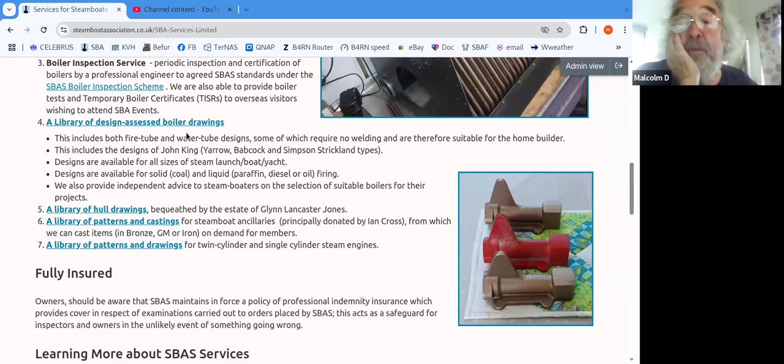And as this page says here, we have a library of boiler drawings, which we're not going to talk about tonight. We have a library of hull drawings bequeathed to us by the estate of Glyn Lancaster Jones. We've also got a library of patterns. We're going to talk about hulls and patterns, and also some patterns for some engines. So let's do it in the order that I think Brian suggested. So if we go and look at the SBA castings library, we'll just walk through each of these to give you a feel for what's going on.

As a by the way, that's a hand pump that was... Daniel. Can you mute your mic? Not doing it. What you're looking at is a set of a hand pump. Just silence Daniel.

There you go. A hand pump, and that's actually pattern number 12. We'll go and look at that in a bit. First of all, we should just explain how the ordering process works. And it's really, really simple. At the bottom of this page, there is a link. And if you click that link, it will create an email for you with places where you can fill in the information.

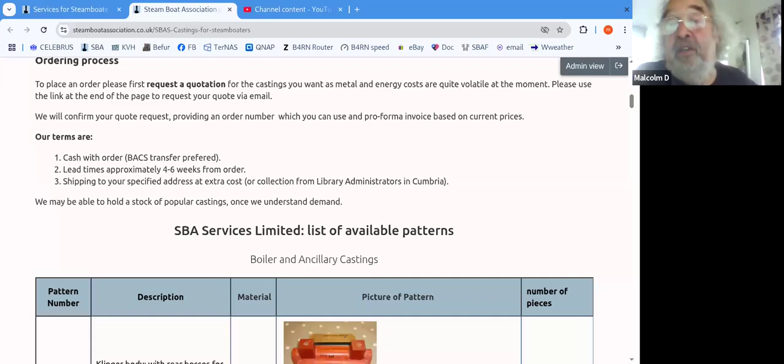The way we do this, because of course the prices are entirely dependent on cost of materials, and they go up and down as bronze and other things move in price. So the way you do it is you place an order on us, we give you a formal quote, and if you choose to go ahead from that point, you send us the money, we order the castings, and it'll all get delivered. What I'm going to do here is just go through these quickly. If anybody has any particular questions about any one, then stick your hand up. John is here principally because he knows more than I do, and so he can fill in any background.

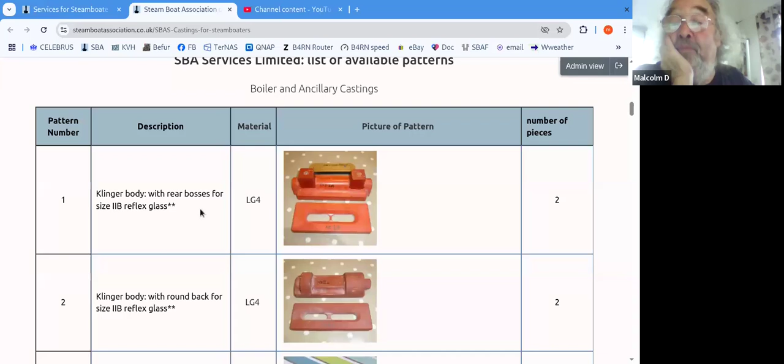So the first one is a Klinger gauge glass, and I think everybody believes these are far safer than the round glass variety. Basically, you've got a flat, thick plate of glass, an inch or two wide, 6 or 8 inches tall, that's held behind that plate with the hole in it. And then the fittings to the boiler go on the back. I actually built mine using those castings, but following a drawing from John King, which he produced for the Yarrows, and which have three-way cocks built into the back of the gauge.

And some of the inspectors don't like those because, as Mr. Davis points out to me, cocks should hang down, and in Mr. King's design they stick out, and that wasn't favoured. But it's a very nice thing to do, very easy. You can use separate cocks and plumbing to fit it. You got anything else to say about these, John? No, nothing more than what you said. I mean, the traditional gauge glasses. My argument with John King's design was the cocks rather than the glass. Yes. Part of it, you know.

There are two kinds here. There's number one, which is where the water and steam comes in at the back. Number two can be arranged on a longer gauge, with them coming in at the ends. And number three is for the smallest A1s, 1A size, which is really quite small, which is also usually arranged with them at the ends. But yeah, you can play around as you like, provided they're safe. One question is how do they interface to, say, if you put it on the drum end of a water tube boiler?

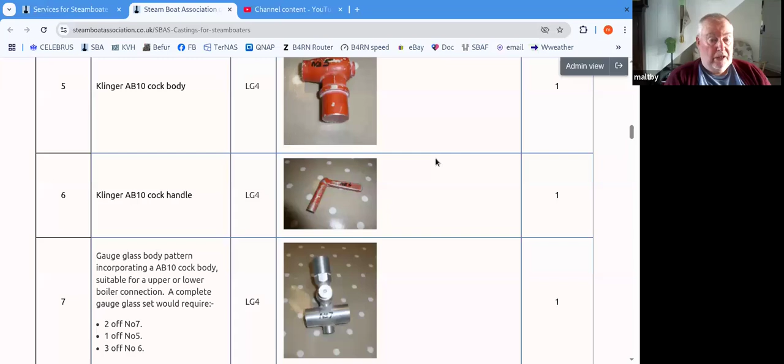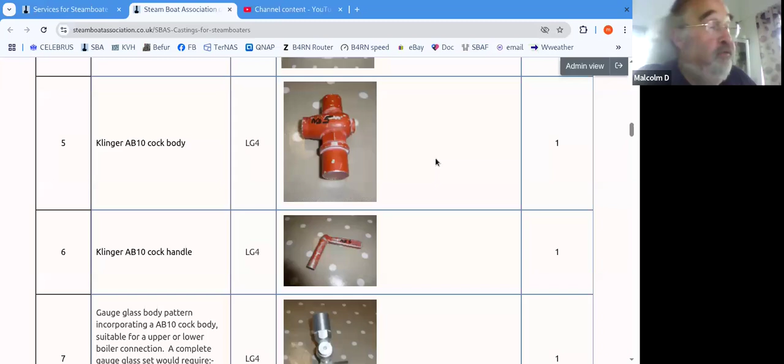I would say that in the drawing pack, I know we're not talking about boilers, but in the drawing pack that goes with John King's boilers, he has included a full set of drawings for cocks and manifolds and all sorts of things. It was a very comprehensive set.

The next one down, number 7, I don't recognise that at all, John. That's the top fitting for a gauge glass of more traditional style. Says you can use it for either, yeah? Yeah. The one where you can see the diameter end facing you, that's where the cock is. That is the cock body, yeah. And the other bit is where the glass goes in. No, that's where it screws on the boiler. Obviously it's 90 degrees out of phase as it would be assembled. And then at the other end you have a tap towel for pushing the glass into.

Brian, you raised your hand. Yes, just another question. I guess it's a general question. How do we understand the sizes of these? For instance, in terms of the boiler interface, I assume that's a BSP size. Would that come out as 3/8 or quarter or half-inch BSP, roughly, to get an idea of the size?

I couldn't tell you off the top of my head. I can go and find one if you like. That won't take me very long, and I need to go anyway. So I'll be back in a minute. Just talk amongst your friends. You talk amongst yourselves. I've always wanted to say that.

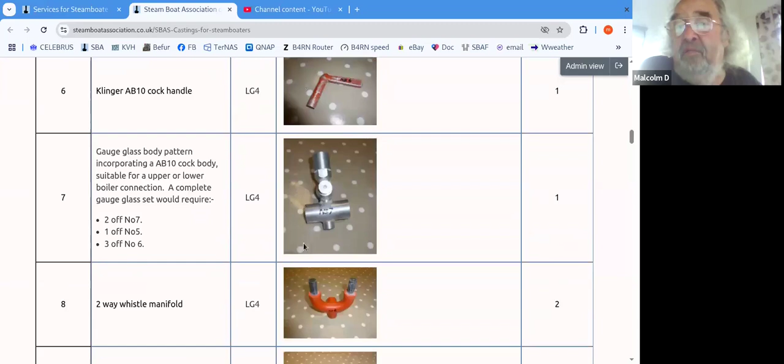So John is now rummaging through his stores. He'll show up with one any second, I'm sure.

I guess it would be useful to have in this table, Malcolm, just to give an idea of the size. Yeah, I mean, I think the point is that you can make them pretty much as you like within bounds of the metal that's there. So for the Klinger ones, I'm pretty sure I used 3/8 BSP. But as you say, the hand pump, for example, the one I showed you right at the top of the screen, which we'll get to, number 12, will take pretty much an inch bore. I sort of pushed it as far as I could because I wanted a larger hand pump. But the drawing that comes with it shows something a bit smaller.

While John's gone, we'll just quickly touch on the whistle manifold. Pretty obvious what it is, really. If you've got 2 whistles, that's how you put them on. The core box isn't for sale, that's just part of that casting. There's a bilge ejector that I think is probably sort of 13mm-ish, because you're probably into copper fittings at that point. But again, John will return and tell us, I'm sure.

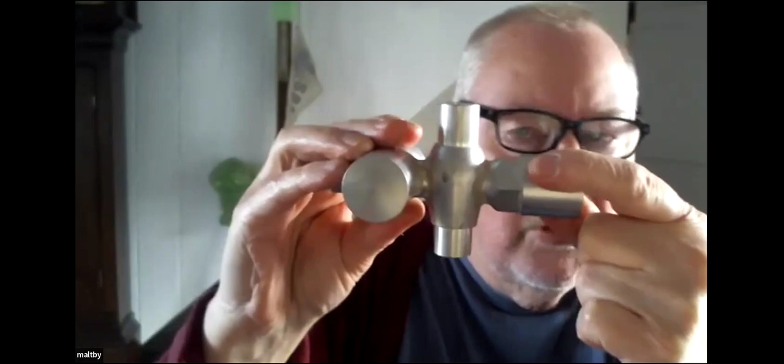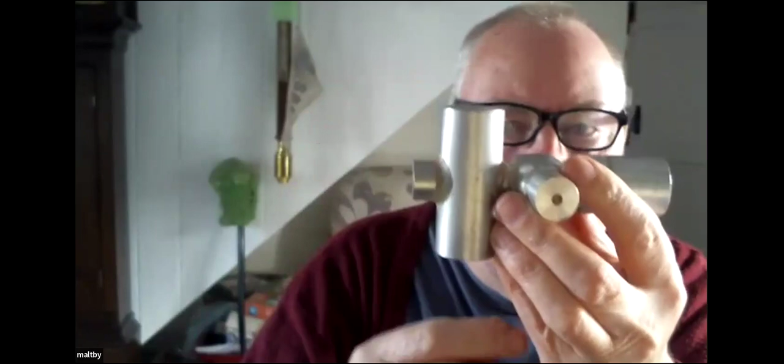Oh, sorry. That's what is nominally a top fitting. This is the bit which you put the thread on for screwing into the boiler. That's where the Klinger cock goes in, and then that is like that, and one half is where the gauge glass goes on, and the other half will be tapped with a plug for assembly.

John, I don't know if you heard there were questions about sizes of some of this, like what BSP sizes would that take? Well, looking at it here now, I'd say it could be 1/2 inch. Probably 1/2 inch would be the normal size for this size of gauge glass, or you could obviously make it smaller.

Right, I'm going to return to the screen here. That's a finished Klinger size 10 cock. Well, it's not finished, but it's finished components. As you can see, that's quarter BSP at that end, 3/8 at that end, and that's the pattern for the same with the body anyway. That's number 5.

So they're fairly changeable. As I say, this has got quite a big thing on there, so you can turn it down to 1/2 inch would be common. I don't think you want to go much above that, would you?

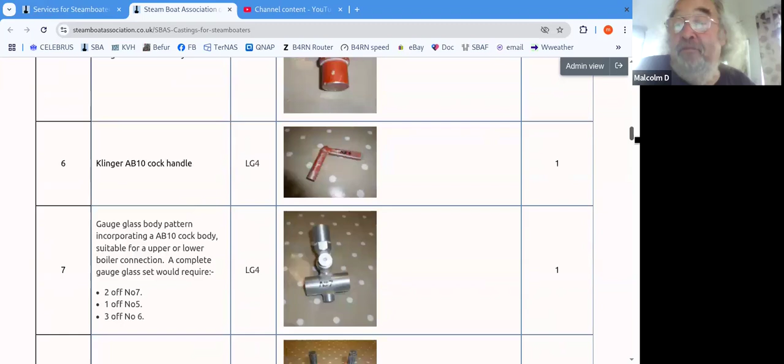As this is one you've made several recently, how much does the casting work out at roughly, in broad terms? One of the few I know, that was £150. Okay, that puts things in perspective. That was in 2023, so I don't know whether bronze prices have gone up or down since then. Basically the way we do it is we cost it and put a 30% margin on it, because it's trying to generate money to help with the boiler testing costs and post and packing, that's all.

For example, I've just built a vertical feed pump, which is a lot like the Southworth one, but made from patterns by Ian Cross. We'll sell you one of those for 180 because we've got a set on the shelf. If you went and bought the genuine Southworth ones, I think they're 460 now, but they are in gunmetal, so it's your choice.

Handrail stanchions for 5/8 tube, 2-inch centre height - look, we've got dimensions on it. Well, as I say, anything you need clarifying, just drop me an email, no problem.

I used 4 of those on the boiler on Beaver just to provide handrails on the lid, because we've got the dog kennel style housing, to provide handles for crew going up and down the boat. Very effective because the tube just slides in and they just bolt in from underneath.

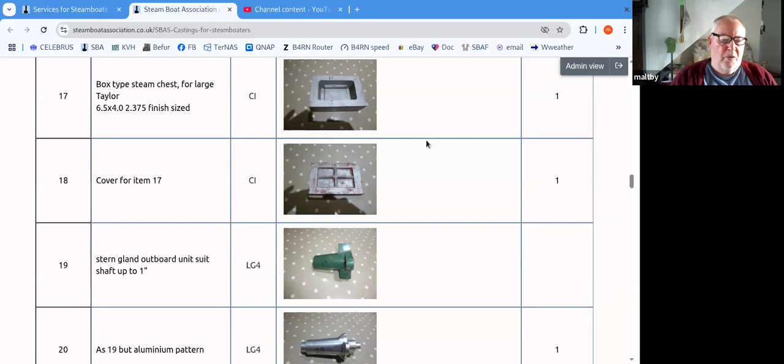Then we've got a pair of stern glands. I guess everybody knows what a stern gland is - screw on the outside of the boat to hold the propeller in place, for shafts up to 1 inch, which is most boats. I think we ran 1.25 inch in Beaver, but that's because the prop shaft is something like 9 feet long. So they're just stern glands.

A dished hand wheel. Well, yes, I don't know what you'd use that for, but it's there, so somebody might want it. You occasionally find engines with screw reversers, don't you? Might work for that.

Yes, I always think they look better with the old, sort of old-fashioned lathe type handle, you know, with a ball at one end and a handle at the other, if you know what I mean. But then that's just my...

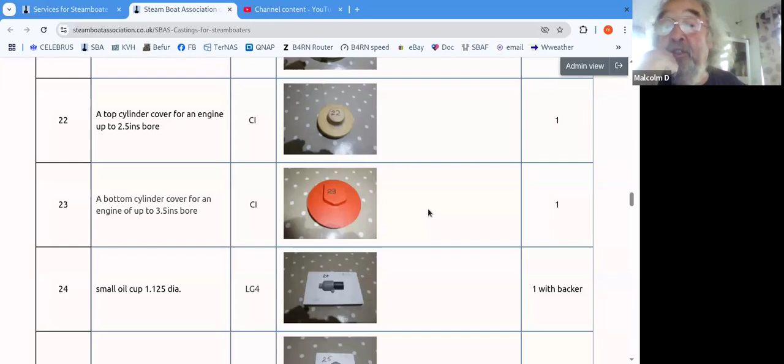strangeness. And then we've got a pair of castings if you're feeling like making your own engine from scratch, and you're just looking for cylinder covers. Then there's a pair here, 2.5 and 3.5. Yeah, they're just odd things that are in the box, kind of thing, you know.

And then we've got an oil cup for sort of main bearings typically. Is that right, John? Well, yeah, I mean they're just conventional old-fashioned oil cups with a flip lid, you know. And a lid - get a cast lid for it. Very nice too.

There's another hand pump here. Yeah, this is a bit smaller than the other. This is one that Bill Hall made. I think he must have made the pattern himself, I don't know. And it's all right, yeah, it works all right. It's the same kind of setup as the other one.

And then we've got a keel condenser header. So these obviously bolt onto the outside of the boat, designed to take the tubes of the keel condenser, and provide fitted with through-hole fittings. So there's nothing clever about this - this is just a lump of metal of an appropriate shape to turn into a header.

That's it, I think that was off Edward's boat - Whippet, yeah, with that had large triple in it that he made. Yeah, it's got an Elliott Bay triple.

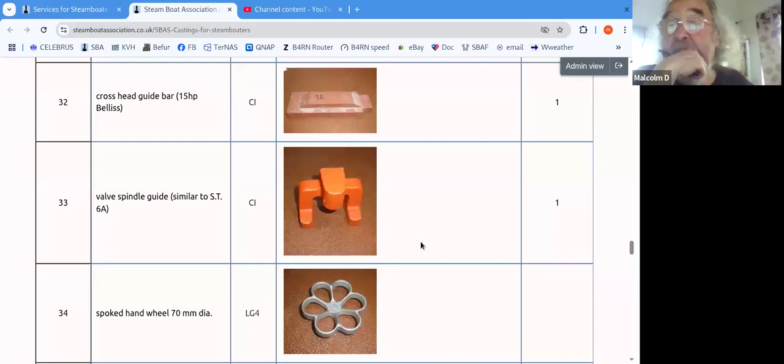The crosshead guide bar for a Belliss. Yeah, I got Ian to make this for me actually when I was building that 15 horsepower Belliss, which is now in a anachronism. I thought I'd just add it in anyway, but it's quite a big chunk, and in CI, so cast iron.

As is the next, which is a valve spindle guide. This isn't actually for a 6A, is it? Similar? No, it's not. It's very similar to the 6A guide.

And then a couple of spoked hand wheels, if you're running short. Yeah, there's 2 sizes of those. I've actually got some of those available. I think the smaller size, if anybody wants one.

And then a slide valve - that is actually the D valve, isn't it? Yes, this is another one that was off the big Taylor. And then the core box that goes with it, which the casting foundry will need.

And then some bearings for that same larger Taylor. If you've got 1.5 inch crank journals, that'll be your animal.

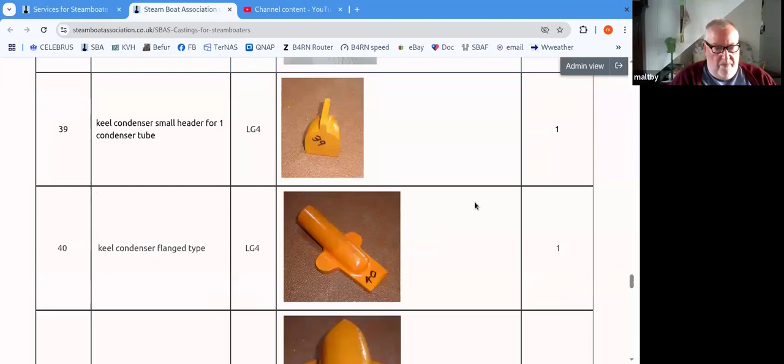A smaller keel condenser - this just takes a single tube. I think the other one was for 3, wasn't it, John? Yeah, 3 times 22 or 28, something like mil, like that. And then a flanged version of a similar animal, and then a larger flanged one, and then one with 2 tubes.

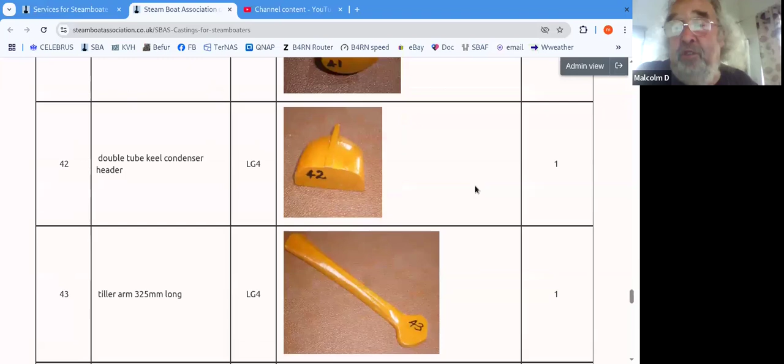The tiller arm, yeah, 300, so it's a foot long, scale of, isn't it? Foot and a bit. Yeah, I think that was built for Bill Hall's boat, I'm not sure. I think so. Okay, okabis.

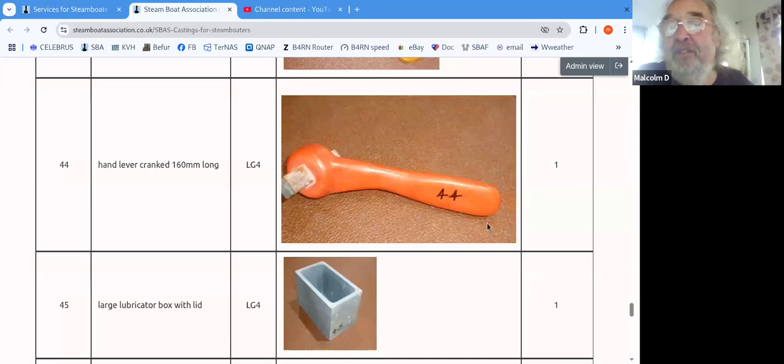And this always strikes me as looking like a ratchet without the guts in it - a socket ratchet. Well, yeah, it's just a handy thing if you want one. Yes, if you've got a hole that shape in your life, you can have one of those.

And a large lubricator box. Yeah, I'm just making one of these at the moment. This is my design. Similar sort of size to the other, sort of 2x3. Yeah, no, it's a bit bigger. It's 3 wide, 4 high, and about 6 long. It's the ones I've built. I built one for Anachronism, and I'm building a second one now.

And they take 3 of these precision pumps that a lot of people use nowadays. The Lubetech type, do you mean? Yes, that kind of thing. The way I build them, I use 3 pumps, and one's for the cylinder direct, and the other 2 go into manifolds, and then I use something like 8 to 15 outlets, each with its own metering valve on it. So they're different sizes depending on the size of the bearing.

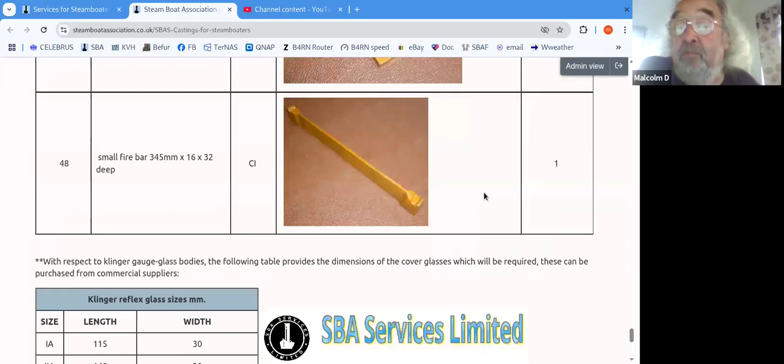Just as a by the way, modern technology being what it is, when I was at the foundry in Huddersfield last year doing the vertical pump castings, they have 3D printers stuck on the shelf, and they make their patterns directly using that, because they're getting customers who want logos and initials cast on the outside. But John Napton produced patterns for myself and Paul Self for sirens, and we've seen some other good 3D printed patterns as well. So that's where the world's going. Yeah, that's the way to do it now.

The only thing for anybody who tries it themselves is that they must have a fairly smooth finish on them, because the first one I was involved with, the foundry said, oh, it's much too coarse. When I pull the pattern out of the sand, it brings some of the sand away with it. It wouldn't in the case of industrial casting, because they use all kinds of fancy resins and stuff. But if it's just a green sand molding, then that is a thing. So you need a fairly smooth finish on the sides of the pattern.

And on that note, as I discovered when I had to cast a new crank for the Leak compound, because just in case anybody tells you otherwise, the fabricated ones fall apart within a couple of hours. So I've cast two cranks, one for me, one for Guy in Holland, in SGI, spheroidal graphite iron. And the foundry pointed out that, unlike traditional grey cast iron, you really don't have to fret about shrinkage anymore. Providing you've put sufficient allowance for machining on, that'll be fine, because the shrinkage between pattern and casting is the order of 1 or 2%.

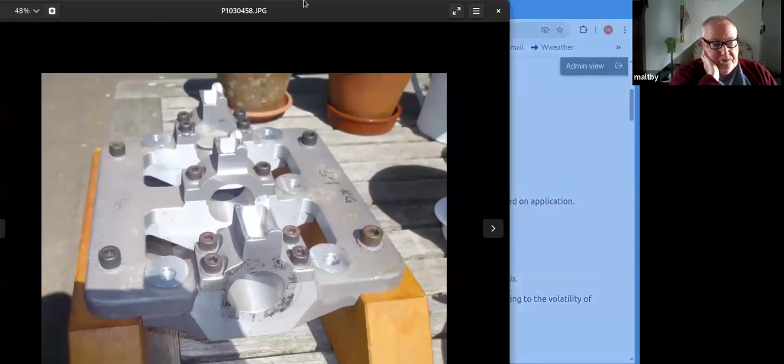If I can get it in, that's the bed. Yeah, that's the finished bed plate. That's actually high grade aluminium, but they could easily be made cast iron. There's another view. Quite a compact engine for its size, but nice and leggy. I thought the trouble with Taylor engines was they're a bit short on the conrod length. Even though I've got one in my boat.

So I made a start on the cylinder drawings, which if anybody's interested, I'd be willing to complete, and so there's a complete thing there. Sorry, there's a single and there's a twin available. That was the twin that you've just seen. Quite a good little engine.

And then the third one we've been donated is Phil Moore's set of patterns, and a drawing, inverted commas. To be honest with you, I'm not very happy with it. I don't think it's a very good thing myself, but other people might. Other people have built them and modified them to suit their own needs. But given the choice, I'd go for the Ian Cross one. But I think it's important to reiterate, John, that it'll probably stay in a partially finished state unless somebody actually decides they want to buy some.

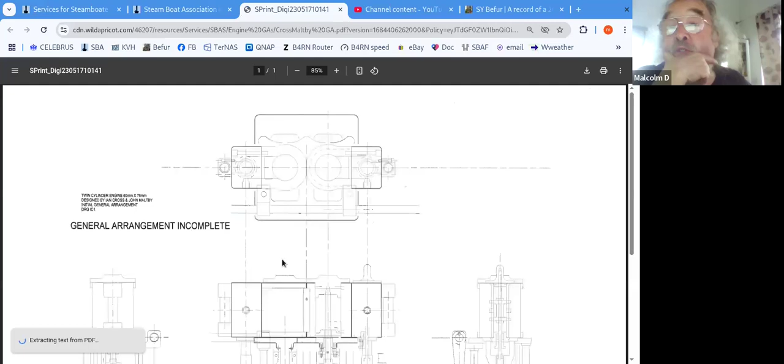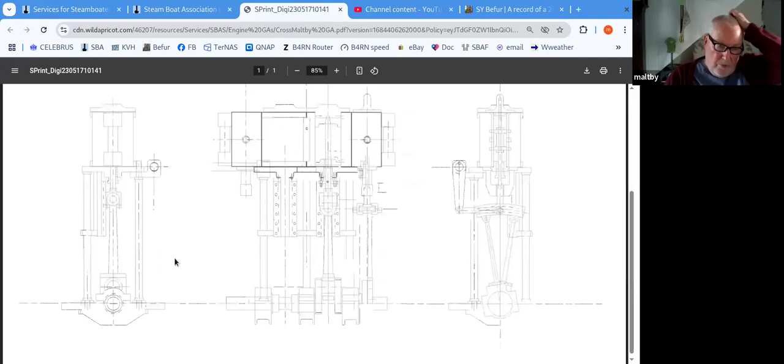So this was for the one that John and Ian created, so you can see the style of thing. Is that visible enough? I think it probably is. Yeah. Sorry, somebody wants to say something. Oh, I just doodled out the cylinders. They're using piston valves, which is my favourite thing.

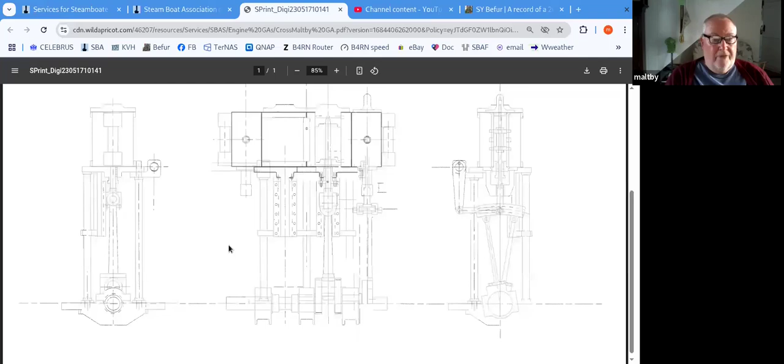I would never build another engine for myself that didn't have piston valves. They're so much better, in my view. And the amount of running hours that these things do, I can't see the point of not having them. But that's, you know, my own personal view. But yeah, it'd make a nice engine, that.

We've also got that example of Phil Moore's drawings, which is here. Yeah, I believe he was a builder.

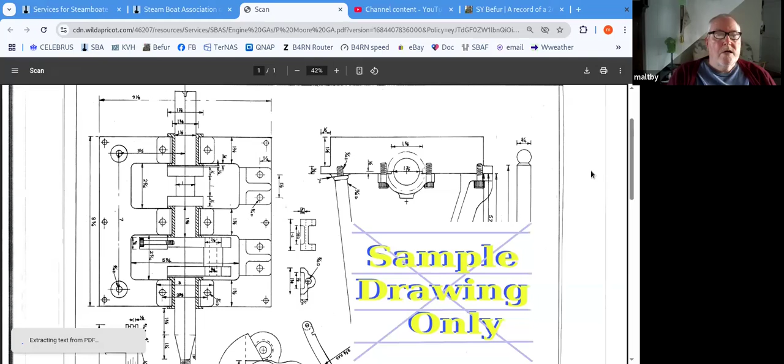With bricks and mortar, you mean? Yeah. Not saying anymore. But that's that.

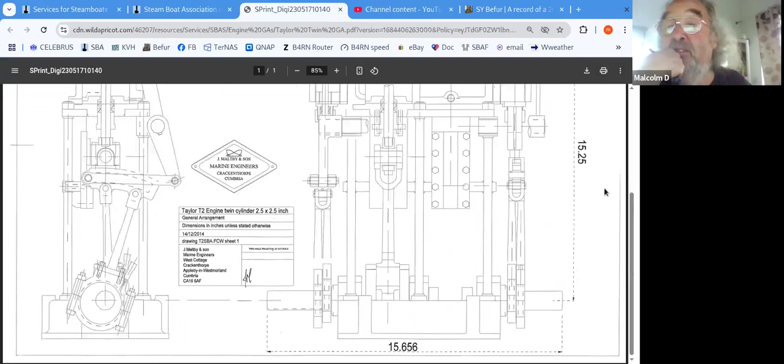And then we've also got the drawings for the Taylor T2 that John produced. All of those are for sale. And so then there's the patterns that sort of go with that. So, John, do you want to walk through these?

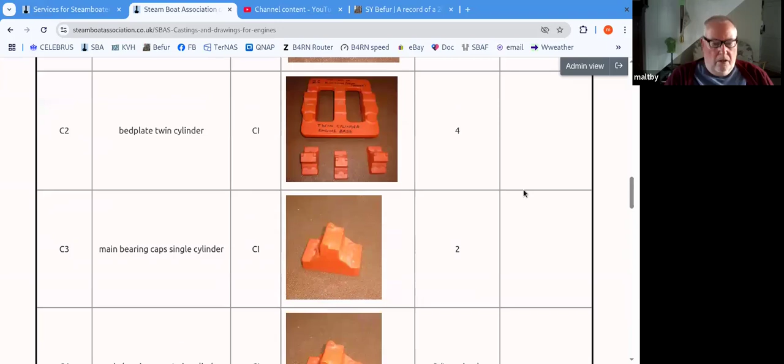Yeah, these are Ian's patterns for that first engine. This is a single cylinder bed plate, 2-cylinder bed plate. A lot of common parts for those. The entablature plates, they're fairly conventional 4-column or 6-column engines.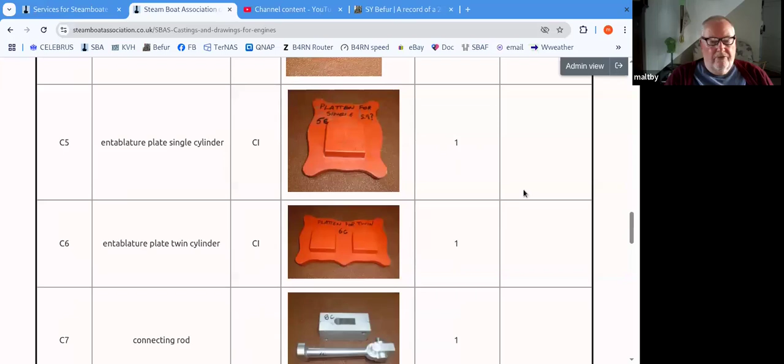The cast conrod, which is interesting, that'd be SGI, of course. The advantage of SGI is it's sort of shock-proof, is the way the foundry describes it. It's curious stuff to machine. I've just made this vertical pump, and it's quite definitely halfway between cast iron and steel. So it produces spiral swarf when you drill holes in it, and then it still covers you in filth, just like it was real cast iron.

Eccentric straps. Yeah, these links are what I'd call the box type ones, where the running surface is actually a slot in the middle that doesn't go right through, if that's perhaps a bad way of describing it. Used a lot on American engines, particularly American Navy engines.

And then we haven't got pictures of all of these, but we've got a full set of things. You can find these on the website. There's a pretty comprehensive set there. Again, there's a link at the bottom that will produce a similar looking email. You just fill it in and send it off, and we'll give you a quote. Do we have any questions on the engine stuff before we go off and do hulls?

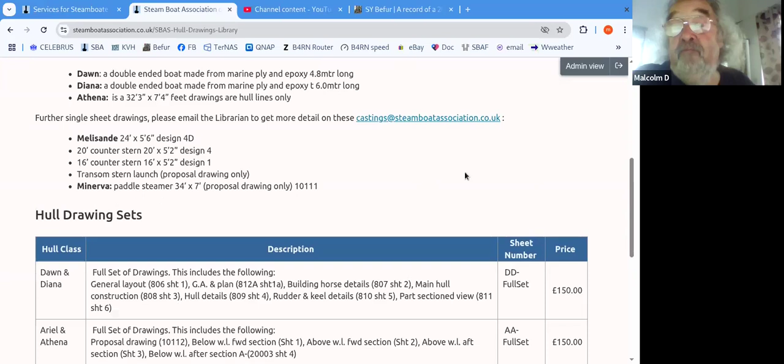Glenn Lancaster Jones's family bequeathed the library of hull designs to us, and that covers more than 3. Dawn, Diana, and Athena, the first 2 of which are double-ended boats. And we've also got single sheet drawings for Melissa, a 20-foot counter stern. John, do you want to talk about these? Sorry, I think it's Melisande, not Melissa. Right. Never mind. Well, I don't know that much about them.

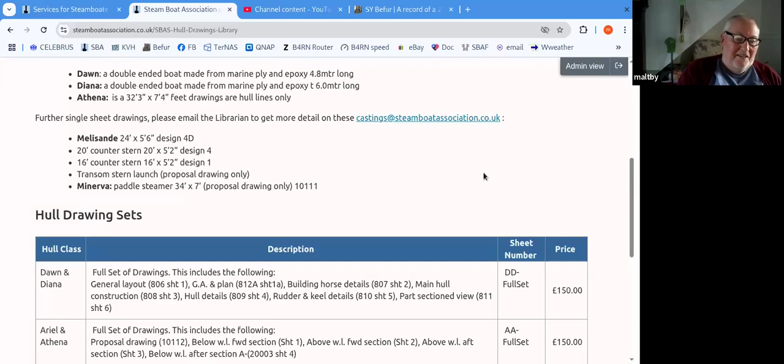I mean, Dawn and Diana was his first thing, which was serialized in Engineering in Miniature way back in the day. And of course, they were made from plywood, fairly basic shapes before everybody got into strip planking. And so once the strip planking idea took hold, they seem to have died off a bit. But these are perfectly sound boats, and they're easy to make, I believe. And I hate woodwork and will not ever touch it with a barge pole, so you're not really asking the right person. Although Grayling is made in a similar way and performs perfectly well, doesn't it? Yeah, but I didn't make the hull. No, but it is the same. Well, yes, basic plywood hull, but hard chine. Yeah.

And the last one there, which is interesting, we've only got a proposal drawing for, is a paddle steamer. I've seen a version of Minerva that came over from Switzerland at Windermere, and that was quite a fun thing. Steamed. Yes, indeed. It was a nice

boat. Weird people, but a nice boat. General description of Switzerland, I think.

And so we do sets of drawings for Dawn and Diana, and Ariel and Athena. The others are just single sheets, partial stuff. And again, with the drawing sets, Malcolm, are there parameters relating to how much mass of machinery they'll carry, that sort of thing? How would you go about working out all the sort of parameters beyond the drawings, as it were?

John, do you have anything you want to say, or I can provide you? Not really in my field again. Yeah, I mean, the other dimensions are there. You could work it out using the naval architect's basic system. Nowadays, I think it can be done very easily, but it's not really something I've studied. I've got a book which, if somebody reminds me, I'll send a reference to, that discusses all of the marine architecture issues of hulls and design and stuff.

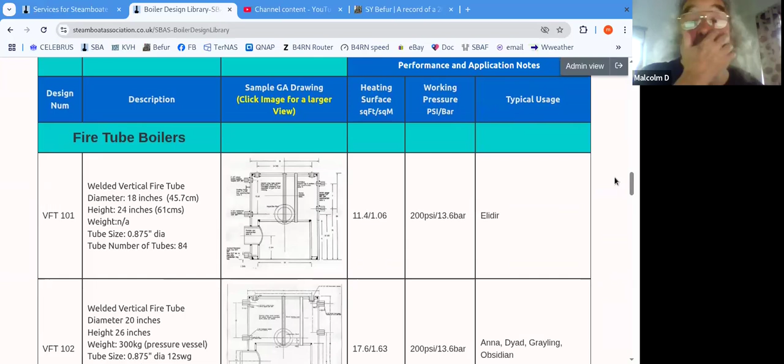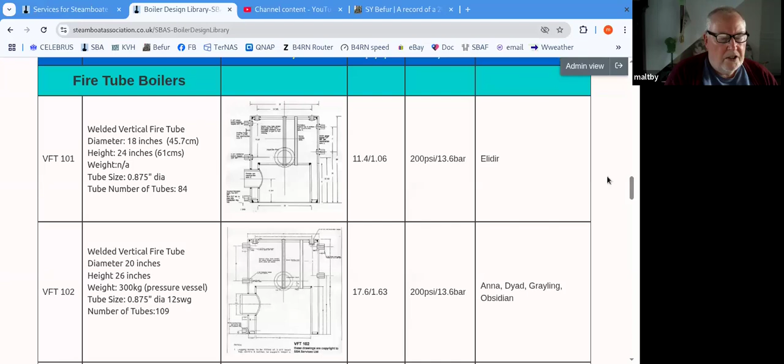So ordering is pretty much the same, except these sort of fixed price things. And we basically got boilers that you would recognise in the fleet. So, John, you should better talk about these than me. We've got a set of vertical fire tube boilers. Yeah, they obviously, as you could see, go up in size from about 18-inch diameter, up to... Can you just scroll down the page? I think it's up to 26, VFT says.

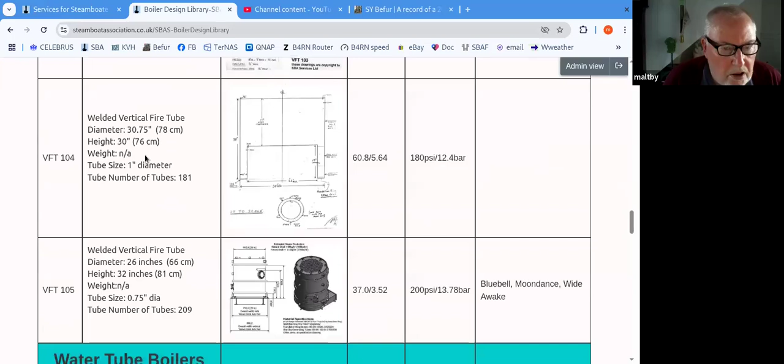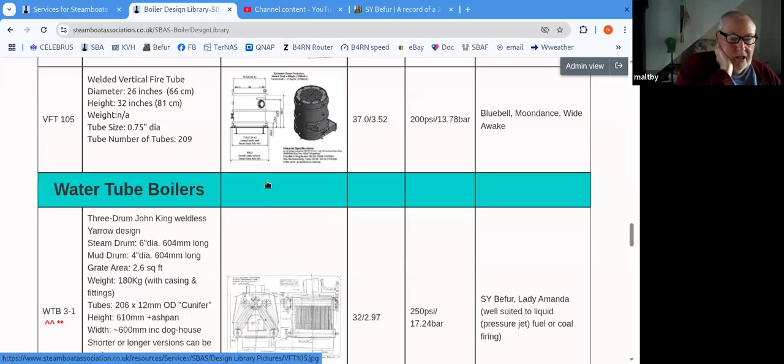Apart from 104, they were all designed by David Beale. The late David Beale was a very good engineer. 105 has been modified by Kevin Slater, who's with us tonight. And they're sound boilers. They're a bit heavy for what they do, but they're fairly bomb-proof, if that's not a silly way of putting it. And by clicking on the pictures on the website, you can get a bigger version, so you get a feel for them. There are two things that you've got to watch, though.

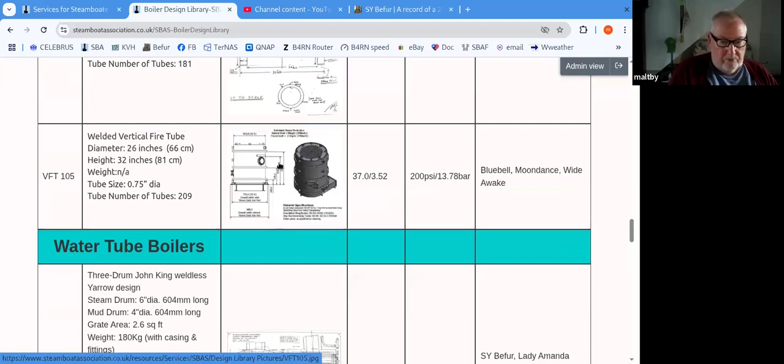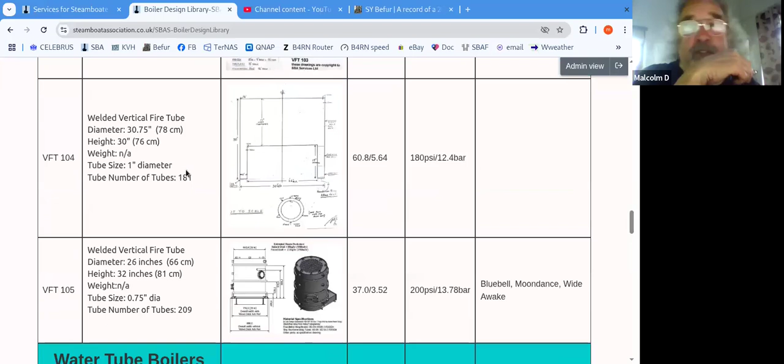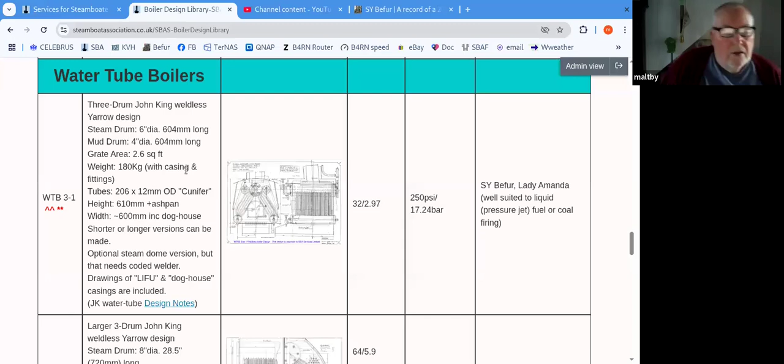My advice: don't try and make one yourself. Not one of those, anyway. A, you need to be a coded welder, and B, you need to have a fairly good idea what you're on about. So it's best to get one of the experts to make one. This is not a stick welder in the garage kind of job, is it? No. If you do want to make your own, then these water tube boilers are a better idea. These 3-drum and 2-drum ones were designed by John King. That's the 2-drum. I've assembled the 2-drum one with the pressure vessel made very competently by Kevin there. Not for me, for a customer.

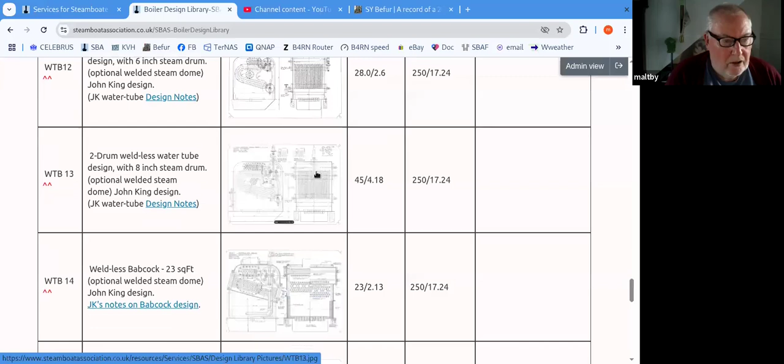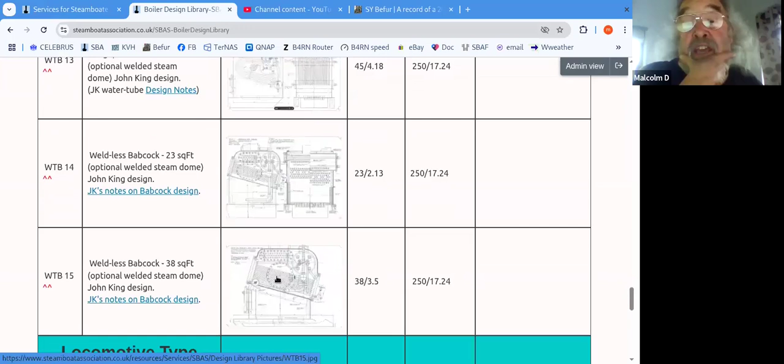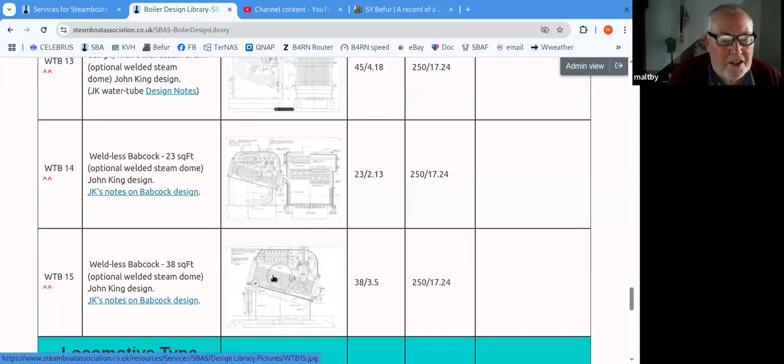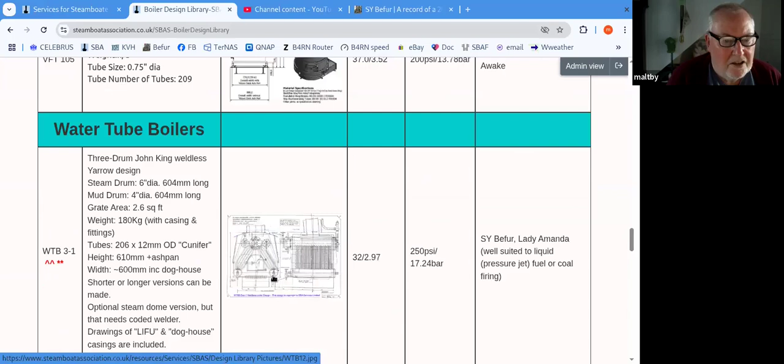Excellent. And then there's a Babcock, which requires some sort of CNC level machining to make the headers. Oh, yeah, you could do it on a Bridgeport, but I think your arms would be ready for dropping off by the time you've finished. It's true. They ought to be CNC. I see Kevin shaking his head there. The headers are really a CNC job. But the 2 and 3-drum ones, I've made 3 of these, and they're very easy. You need a bit of patience.

We called the electric board in after we'd made the drums for all 3 of them because we thought the meter had broken and lost its calibration, but they checked it and pointed out the reason our electric bill had tripled was because I'd spent a month on the milling machine drilling the holes. So 200 and odd tubes.

You can make these in a variety of lengths. In fact, you can make them in any length. But there have been them made with sort of 15 sets of tubes, and then I think on mine it's 21, and I've seen them longer.

They are drawn here as coal-fired, but we put an oil-fired burner between the mud drums, and that works. Roger Heisey's boat, Etna, has a Yarrow of similar style, but he mounts the burner much lower down, effectively in the ash pan, but I didn't want to be in the bilges. But they're very doable, and sound.

We've got sort of heading for 10 years with that. How do you get the tubes in then? They're copper tubes, aren't they?

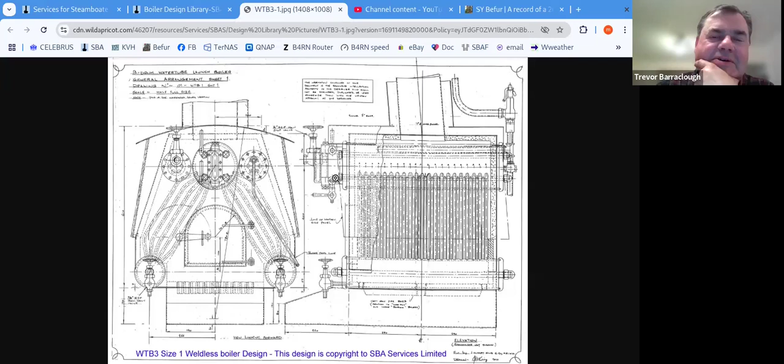They're Cunifer tube. Yeah. And are they expanded in? Yes, just to, you know, because they're 11 and a bit mil, I think. You have to think about it a bit, because you don't want to put one in that you can't get out. Nigel actually did all the tube bending. He made a jig at his place in Sussex and had a long weekend bending 600 and some tubes, and then they just slot in.

We went through the discussion about whether it was worth reaming the holes, and John King had done a bunch of research on that and concluded it wasn't necessary. So I just drilled all mine on Rambaudi mill as it happens, because it was long enough to get the whole thing in and do it all in one setting.

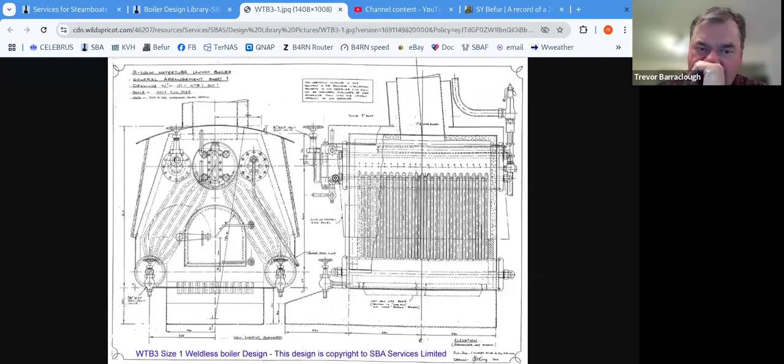I just drilled them with a stub drill, and then you put the tubes in place by hand. They're not hard to go in, they just fit. A bit of jiggling, and then you get a normal tube expander. But what you need to do is rig a thing that will drive the tube expander, with a portable hand drill on the other end and a length of bicycle chain, because getting down the drums is hard.

But it was a day to do each one. And once I'd expanded the row I missed, they came out perfectly sound and went through a 500 PSI test, bone dry. So good, very doable.

The thing to note is they're particularly well suited to oil firing because, of course, they've not got much water in them. And so we have a pressure switch on it. So when it gets up to actually about 225, the burner cuts off and it just manages the pressure there.

With a coal fire, you've got a bit more management to do because it's quite a quick responding boiler. But having said that, John Richardson has exactly one of these in his boat and does perfectly well. He's probably a better fireman than I am.

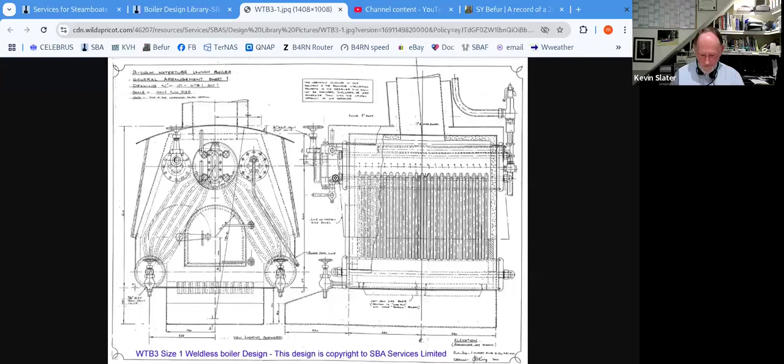I would always recommend a vertical fire tube for a first timer or an inexperienced steamer. They are more passive, easier to manage, coal-fired or oil or gas-fired. Certainly true of coal. I mean, oil-fired, I'd turn the switch on and then turn it off at the end of the day. Everything else is done by the electronics.

But it's coal-fired, it's much more difficult. Sorry, we're looking at that. So we were going down. So we've got a selection of water tube ones.

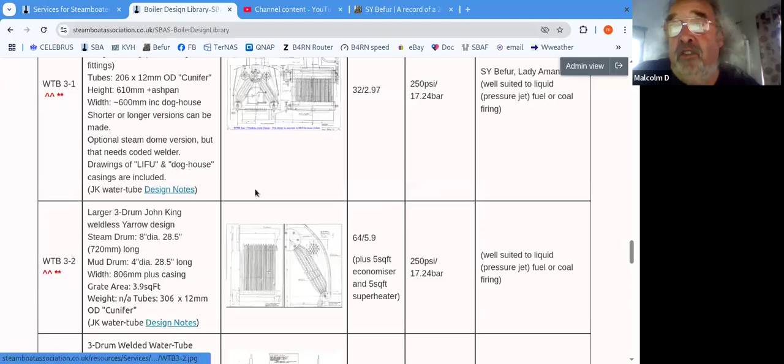As we say, we've got 2 Yarrow types, a small and a large. Then some welded Yarrow types, which is what Anachronism has in it. And that is a very fast boat.

How long is it, John? It's a good question. 28 foot, I think. Yeah. And it'll do 10 knots. It will really motor, when he puts enough coal on.

When we first got it going, he thought, well, it's not really producing as much. I said, well, that's because you're not putting enough coal on, you know. It's a big boiler. It's a number 10 there, WTB 10, about 60 square feet, I think, thereabouts.

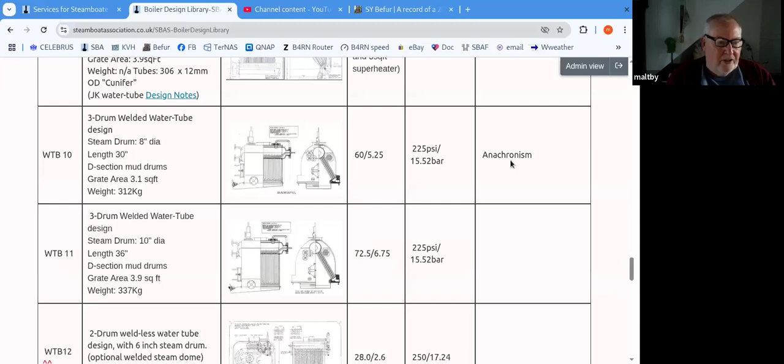And when he first fitted the boat out, he had coal bunkers that were the size of a scuttle, and not enough to light it, let alone go anywhere.

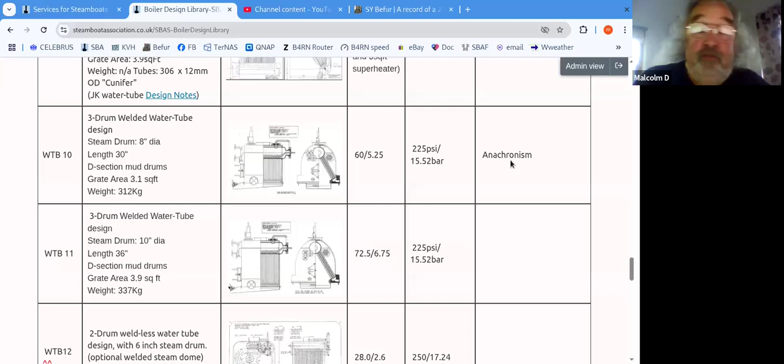But the last time he went out, he's sort of getting his hand in now, and it really motored along. Yeah, he sent me a Google Maps 3D replay, and it was well over 10 mile an hour. So it was 10 knots, rather. It was a very rapid piece of kit.

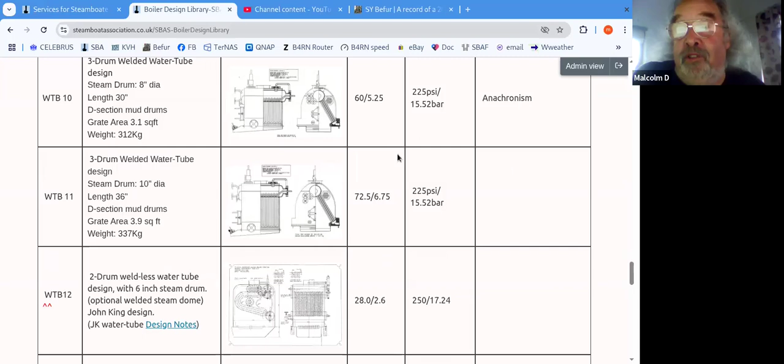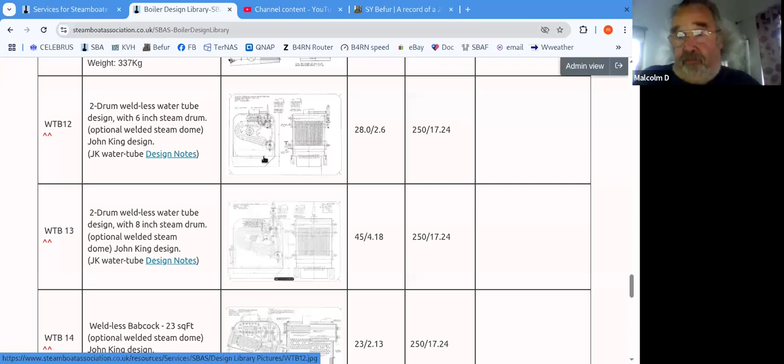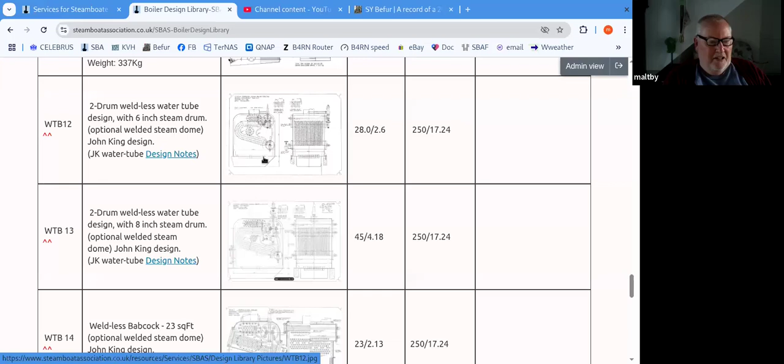So if you need larger 3-drum welded boilers, that's those things. This sort of 2-drum doesn't have the complicated headers of the Babcock. Chris Davis has got one of these, hasn't he? Yes, he's made one, and as I say, Kevin made a pressure vessel which I finished off for a boat called Williamette, which has been about 20 years being rebuilt, and it's still ongoing. But I hope to see it before I die. He's certainly made a fantastic job of it. Unlike the Yarrows, they come with either 6-inch or 8-inch steam drums. So feel free.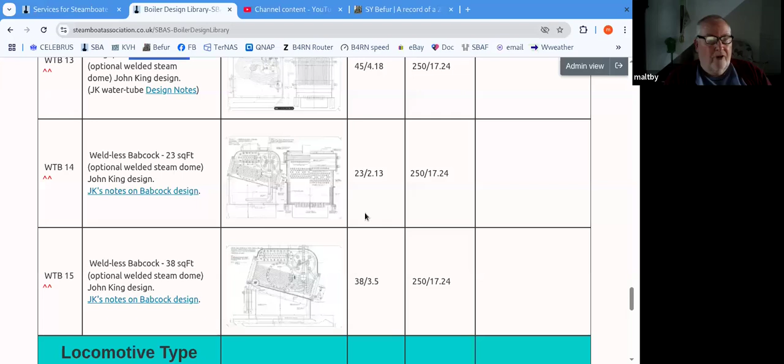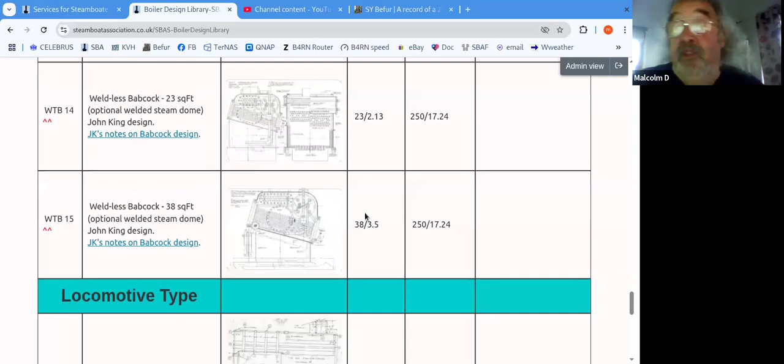45 square foot, the one on Williamette - that's also oil fired. By the way, the decision for me was we were going to put it on the Solent, and you can wander into any marina and find a diesel pump. Finding half a ton of nutty slack is a harder job, so, and you don't have to carry it.

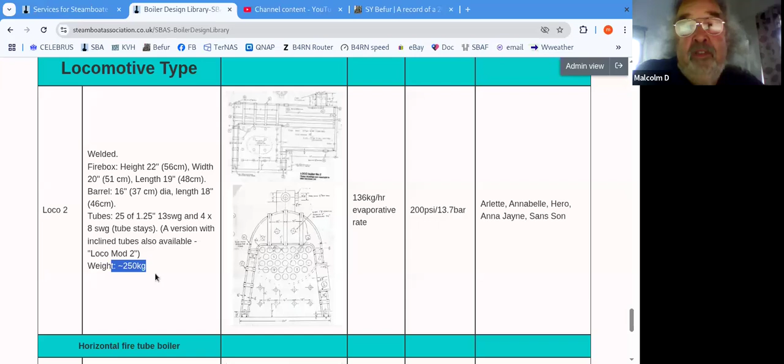Locomotive type, I think this is what Nigel's got. Oh yes, in Anna Jayne. Substantial piece of kit. Yeah, there's a few of these about. That's quite heavy. They're equivalent of a vertical fire tube, I would say. Sort of a quarter of a ton. So, I mean that's the huge difference.

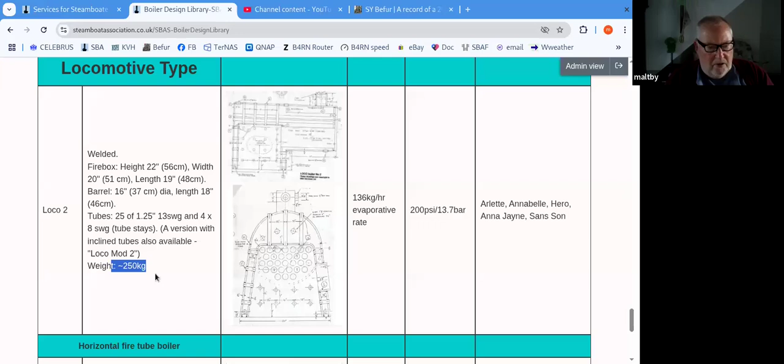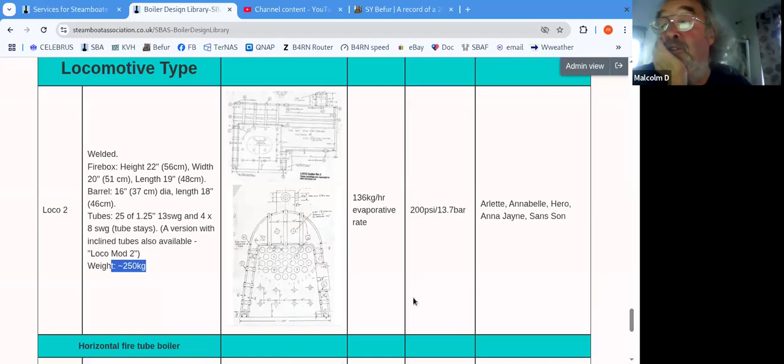I think the original one was built for Arlette, wasn't it? I don't know that job, but yes. Yeah, it's a Smith's job. I mean that's a substantial difference. Is that you're looking at sort of a quarter of a ton, whereas we weighed Befur's...

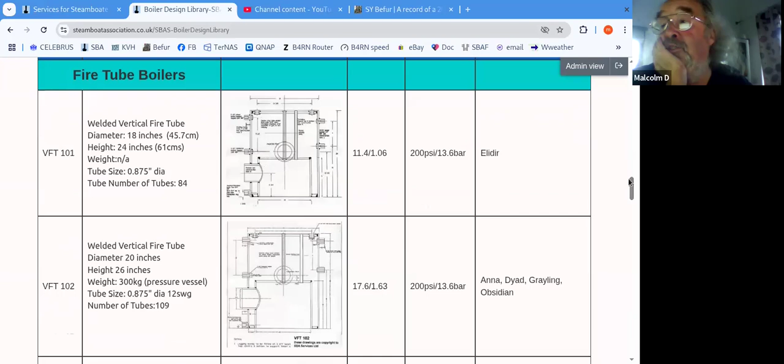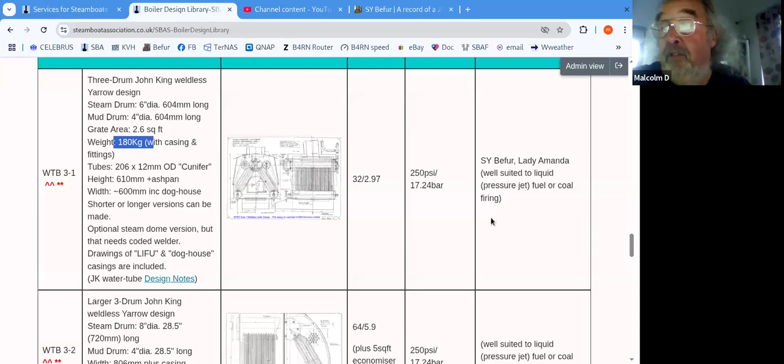Oh, no, I didn't write it down. Oh yeah, oh sorry, that's a fire tube. So they're sort of 300 kilos, so a third of a ton for that. Whereas if you look at these, then 180 kilos. So, and that's with all the fittings and everything. That's as it was lifted into the boat. That's the big difference. And then we've got this, which is an interesting thing.

Yeah, I've never actually seen this, but the one that's extant, Chris Davis has seen it and says it's quite something. I mean, the original Cochrane types, they were in Clyde puffers, they were in workshops, factories, everywhere. It says it's a Cochrane type, but it's not really what I call a Cochrane type, in so much as the firebox is not surrounded by water. But apparently, according to Chris, who knows a thing or two about boilers, he said it was a good one.

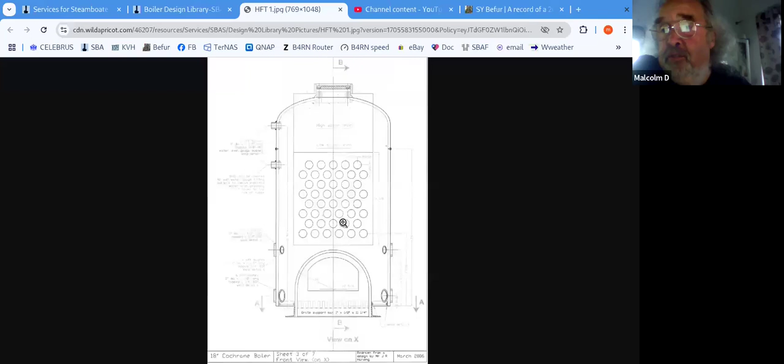So it's almost like a wet back Scotch boiler, isn't it? Is that - no? No, okay. It's like a Cochrane boiler. Right.

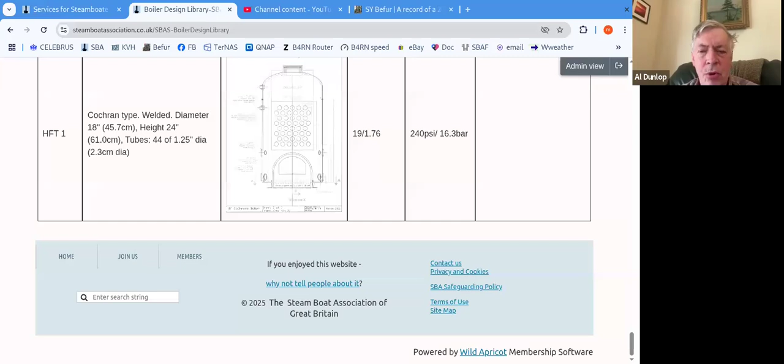Ah, great. Does anyone ever silver solder their tubes in say the Yarrow or Yarrow-like boilers? I've got one that I've been using for 25 years with it silver soldered together, and another one that I've just made, and wondering if anyone in the UK does that.

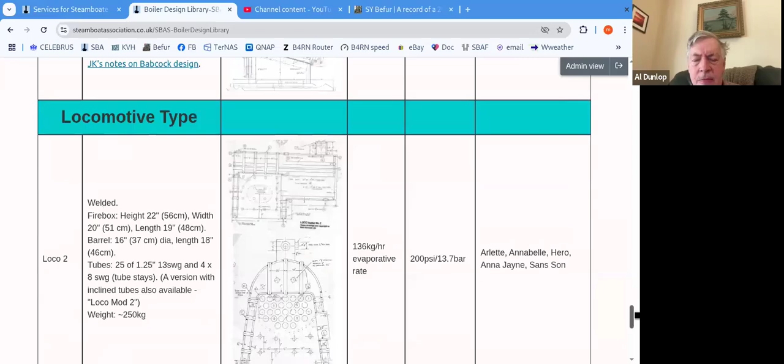Not that I know of. I mean, we do have silver soldered boilers. In theory, they should work all right as long as you don't boil them dry. But we find that expanding the tubes is a very good thing, and it's easy - you know, if you do have a problem, then you can always change them. Yeah, I had a Beaver boiler, still got it in the garage, and a very small Beaver boiler, and that was silver soldered tubes.

Anthony Beaver made quite a few all-soldered boilers. We don't have any in our books at the moment because there's nothing that... they've been superseded really by these modern things.

I've silver soldered a couple of boilers together. One's 55 square feet of heating surface area, and another one's about 30 square feet. Although the silver solder, because I'm using 45% silver, is a little bit expensive - like $300-400 per boiler for the silver solder alone - I've been having very good luck with it.

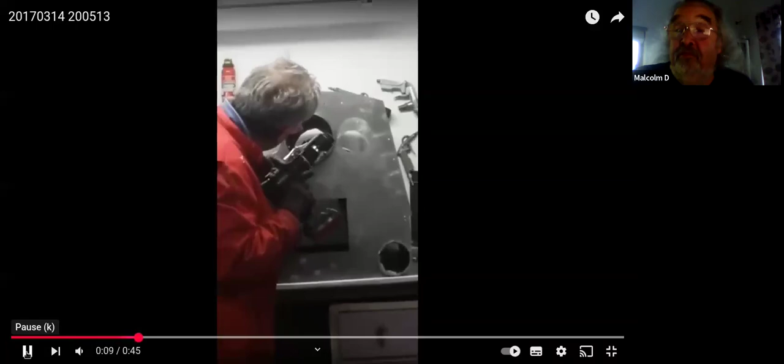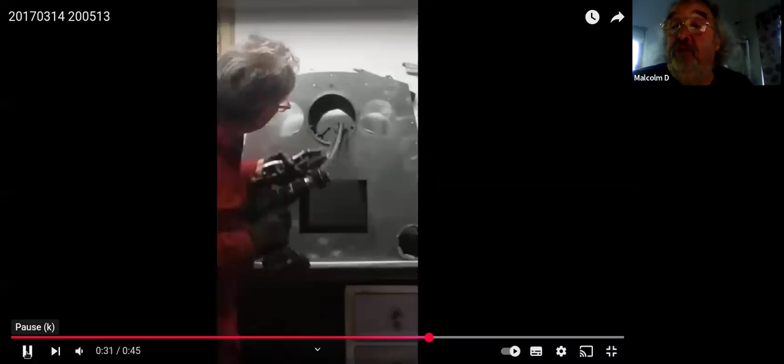And then you just do that one, so you can see how long it takes to do each. And then you can just multiply that by 206 times and 2 ends - and that's what it took.

Brian, I think we're there, unless you've got anything else. Sorry. Trevor, carry on. A very quick one.

So in the British codes for boilers, I've only seen this on the model traction engine side of things, but silver soldered boilers are limited to 100 psi. Don't know if that's why it should be that.

And then the other thing is, I happen to have my father's project, which is a 3-drum boiler, 3-drum, possibly 5 drums if you count the top headers, which is rated for a 100 horsepower steam turbine. He was going to build a tractor. Unfortunately, he never got to build the thing, having passed away last May. So

that's a partial build. If someone was itching to build something fairly interesting, it's a water-walled construction, thimble tubes under the steam drum, which has a dry back and flue tubes running through it. So it's designed for superheat with a preheater in the chimney stack. I've got loads and loads of calculations relating to it, and loads of calculations relating to steam turbines.